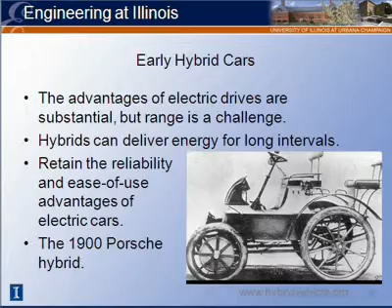Now what happened? A lot of people have different ideas on what happened to electric vehicles. Some people will tell you it's the electric starter and Kettering and other things. Well, in fact, there were two things that happened. Number one really was Henry Ford, if you will, doing it to himself, in the sense of saying, I want to make vehicles for a mass market that have all the features that people want, that everybody's going to want to buy. And sure enough, in 1909, as we had cars that were intended to appeal to a mass market - I haven't tried to do the inflation adjustment on that list price, but it's certainly an intriguing number.

And indeed, at the time, gasoline was actually considered a waste product. It was extremely cheap. In an energy sense, it remains somewhat cheap, although we'll see relative values a little bit later on. So mass production, getting costs down, trying to appeal to a mass market, lots of range, be able to go and do a wide variety of things. By about 1920, the market size for gasoline-driven cars had overtaken that on electric vehicles, and certainly by 1930, electric vehicles essentially were gone, dead and gone.

Reliability has been improving, so if you will, gasoline cars have sort of begun to approach what you can do with an electric vehicle, with still that range issue being there. On the other hand, we had a very long hiatus for 30 or 40 years in which there wasn't a lot of technology change.

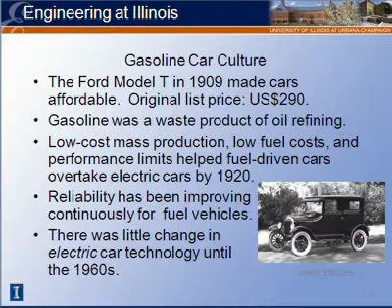Now there's been a great deal, and that's why we're seeing this come back again. Hybrid vehicles themselves began to revive in the 1970s. There were some very nice demonstration projects. Finally, in the 1980s, we got to some serious new electronics applications that made a big difference. The General Motors Sunraycer was perhaps the first classic one there, and I don't actually have a picture of that one, ultimately going to the General Motors Electric Vehicle 1, EV1, project in about the year 2000.

The electronics have been mature now for about 12 to 15 years. When we were doing projects about 15 years ago, there was still an evolution going on. By this time we went through a couple of generations, we were actually working with pretty much commercial off-the-shelf hardware that can do the job.

Batteries sort of continue to emerge. Nickel metal hydride batteries matured enough in the late 90s that they became the basis for the modern hybrid electric vehicle. And the lithium-ion batteries that we have in our laptop computers have now gotten to the point where that Tesla Roadster down there in the lower right can use those kinds of batteries and actually get very good performance out of them.

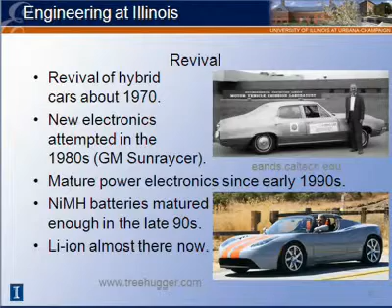So the electronics revolution certainly caught up with this problem in the 1990s. Batteries, if you will, have been moping along and have gotten sort of where they need to be. And the classic example, indeed, was that 2000 General Motors EV1. I don't want to talk about its history and all the things that happened to it. It's a subject of movies and books and other things, some of which is true and some of which isn't.

I can tell you there was a very frustrated engineering team in Troy, Michigan, that was very sad to see that project beginning to go away, and now finally some of the folks up there are seeing the light, as it were, in terms of what could have been done if there had been more focus on it.

But still limited range. That car has a battery full range of about 50 to 70 miles, depending on how it's driven. That's not bad. At the same time, the minivan I have parked out in the circle drive, the fuel light comes on when it's got 50 miles of range left. It starts yelling at me to go get more energy.

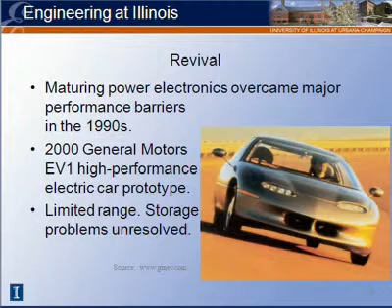So, in terms of a cultural shift here, you have to think of that car as driving around on empty all the time. And some people got used to that. It was easy for them to plan out the trips and understand what they were doing. Others felt like they were always worried about where am I going to be, where's a place I can connect to, how can I get this vehicle charged. It places a damper on what otherwise is a very high performance vehicle.

Now, that said, hybrid electric vehicles have been around for a long time. There's one. And certainly in the very large transportation industry, when you're talking about ships and submarines and locomotives and large mining vehicles, they've been hybrid electric for two generations. It's simply the only way to do very large-scale power management.

So in a vehicle like that one, there's a very large diesel engine indeed that drives a generator, generates electricity, which then is controlled down to electric motors that are hanging underneath on the trucks that actually drive the thing. And when it needs to brake, the motors turn into brakes, send the energy back actually to a set of massive resistors in the back with big fans that blow the heat out. It is a hybrid electric vehicle, and it's been that way for a long time.

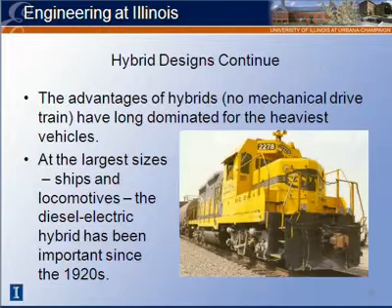And there are good reasons for that. Namely, when you start putting something like an electric motor in a car, you get lots of flexibility, lots of performance, lots of reliability, and relatively low cost. So here's a little motor. I've got a key for scale there. That's one that actually we put into a Ford Escort.

Its nameplate rating says 10 horsepower when you buy it from the motor manufacturer, and it's about a $200 motor. When you look at the way automotive people rate things, its automotive rating is actually close to 100 horsepower. It can take far more abuse than a gasoline engine, but it's perfectly adequate to operate that vehicle. And indeed, if you don't use it right, it's hard to keep the tires on the street.

So it's got a pretty good amount of performance, so performance is not a problem. The motor is easy. The problem, again, is range. It's always range, it's always been about range, probably always will be about range. You've got to store energy that you can deliver to that motor to carry the car along, and it's got to be self-contained and carry itself. So let's look at that quickly, and I'll put some numbers on here to give you some relative perspective.

How can I store energy? There are electrical devices, capacitors, inductors that you can put energy into. There are flywheels and springs. I can hang a great big rock up on a rope and store energy with a gravity method. I can shove a lot of air into a compressed air tank. I can use batteries, or I can use a hydrocarbon liquid of some sort.

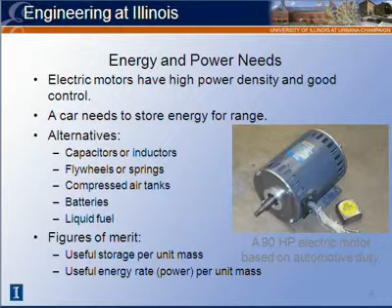Can I make that vehicle accelerate? Can I do some of the other kinds of things that I need to do? So let's get some perspective. I want to list some numbers - metric equivalents, just for comparison.

Lead-acid batteries, we're all familiar with that - everybody's got one in their car. 100 kilojoules per kilogram, whatever that means. Lithium-ion batteries, better by about a factor of 6. That's probably the important thing here. You can take a scuba tank and jam a whole bunch of air into it - that's actually worse than a battery, and it doesn't take into account the weight of the tank, so that's a problem.

Little electronic gizmos that we use, capacitors and some other emerging things, not remotely close to batteries. I have a wonderful brochure from a very expensive, high-end manufacturer of a flywheel system, and down in the bottom it says 'as good as batteries.' So the interesting thing is, after all these years and all the methods and all the things that people talk about, batteries - although people like me hate them - they're a really good way to store energy when you want to carry around something that's portable.

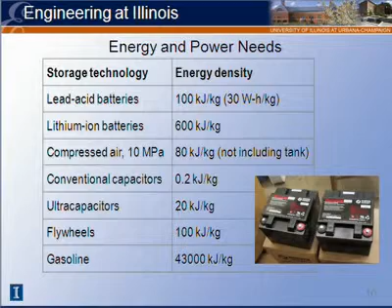And of course, many of us have little portable devices that run on batteries. But liquid fuel, gasoline - 43,000 versus 100 for lead acid, 600 for lithium ion - it's not even close. It's a complete no-brainer. Now the only problem is I can't get all of that energy out. I've got to burn the fuel and run through a thermal process, which typically is only going to give me about a third or maybe even less of what's actually in the fuel coming out to do useful mechanical work. But even with that, even if I give up three-quarters of that, or 90% of it, I'm still far better off than I am with the other technologies. And that's an issue, right?

So here's an electric vehicle demonstrator. It's got about 600 pounds of lead-acid batteries in it, and that massive battery pack gives me about 1 gallon of gasoline worth of energy in that car. Any more than that, and of course the vehicle just becomes a battery carrier - it doesn't really carry passengers anymore or goods, it just carries batteries around. Not a real good trade-off.

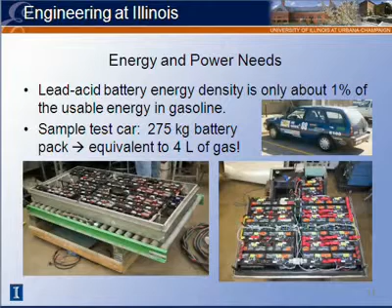So it's really hard to beat gasoline or methanol or ethanol or some liquid hydrocarbon as a way to store energy. And that really is what hybrid vehicles are all about - trying to put those things together somehow.

If I tried to set up an electric vehicle filling station that could fill 6 cars to that equivalent amount of energy in 5 minutes, it would consume more electricity than all of Champaign-Urbana, essentially. So it's really out of the question. And the batteries really can't take it anyway, so it doesn't work so well.

Now, people have put weird spins on this. They said nobody's going to want an electric car because they're going to have trouble refueling it. Well, I don't know. I would rather park my car in my garage and plug it in. Who cares? I'll come back in the morning. That's what I do with my cell phone and my laptop. I don't really expect to plug them in and 2 minutes later have them totally full and ready to go.

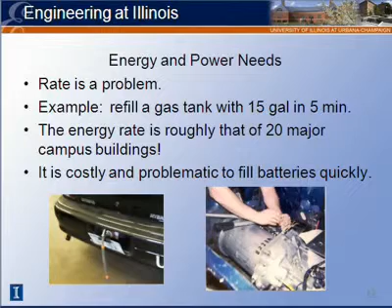It's a totally different world, and indeed there's a lot of disparity in terms of people talking about the different things. By the way, there on the lower left is a plug-in hybrid electric vehicle, which supposedly is a wonderful new technology. That car was built in 1996. The other one is built 3 years sooner than that, but there's nothing new under the sun in many ways, I suppose.

A few minutes about the modern hybrid. There are a lot of different architectures that are used. They really are motivated by different efficiency and emissions trade-offs, and you make a lot of decisions in different ways. I can see this in different things that have come on the market.

For example, it's possible to take a hybrid electric vehicle which has an engine, some sort of electric generator, various controls, one motor (maybe ultimately up to 4, one for each wheel), fuel tank for storage, and trade these different elements off to achieve different end results.

For example, the Honda Insight that was introduced in the United States in December 1999 really was engineered for highest possible fuel economy. When you look at it carefully, you see the issues: it's a 2-seater car, very limited cargo space, a lot of aluminum in it to get the weight down, a lot of compromises to keep the engine running minimally. It gets extremely good gas mileage.

The Toyota Prius, which came out in this country about 3 months later, was in fact engineered for minimum possible tailpipe emissions. I think most of the people who purchased them at the time didn't really understand that. It's not optimized for best gas mileage, although its gas mileage is pretty good. It is optimized for really low emissions, and in fact achieves that quite successfully.

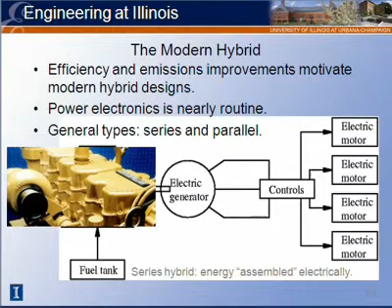Most of the things on the market now are basically parallel hybrids. This one is a clearer representation of one of the Honda vehicles, with a gasoline engine, a transmission, and basically a small motor generator linked into that system to give it some capability. The ultimate is what's on the left, which is what we sometimes call an integrated starter alternator design—this engine basically has an electric motor built into its flywheel.

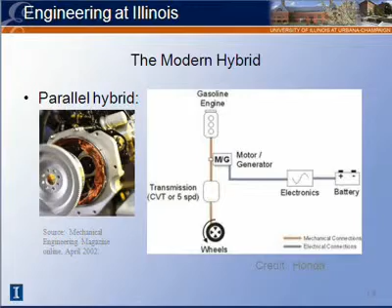What that does in this case is allow it to recover energy when I brake, and turn the engine on and off at a stoplight really conveniently without much noticeable effect. I even saw one version where they actively controlled the electric motor to cancel out torque vibration and basically make the flywheel as if it were bigger, so the engine runs really, really quiet. It's a very impressive technology demonstration that I haven't seen in the market as yet.

Toyota, Ford, Nissan use something they call a dual hybrid because they have modes that sort of look like these different things, although technically we would call them a parallel hybrid. So what happens is in the Toyota car there's a battery pack, a lot of electronics, a motor, an engine, a generator, and then this special transmission that allows me to bring these things together.

And because of the nature of the transmission, they can sort of be mixed and matched. So at times the generator operates, at other times it doesn't. And the things come together then to give a range of functions.

The Honda version is something that's called a mild hybrid that looks a little bit more like the one we were looking at a moment ago. Basically, the idea is to allow the engine to start and stop a lot and get better control over efficiency in particular through a process like that.

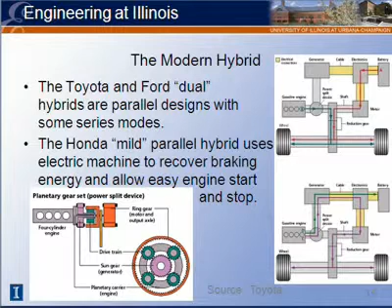Now, I don't want to get technical, but a lot of people who work in this area like to say that their vehicles have continuously variable transmissions in them. In fact, the transmissions in those cars have no variation at all. They're all single speed, fixed. But they have multiple parts so that basically you can bring the energy in from different directions and sort of achieve the effect you would have as if it were variable, but it's not. So I don't know, that name came out of somebody in marketing instead of somebody in engineering, I think.

As you know, there's some in production. The original version of the Insight, again, a two-seater. The original version of the Prius, and those now have been around for a long time. And I remember when they first came out, people said, you know, they're going to have problems with batteries. Batteries are expensive to replace, you know, so on and so on. The car at the bottom there.

You bet. And I use them constantly and charge them a lot.

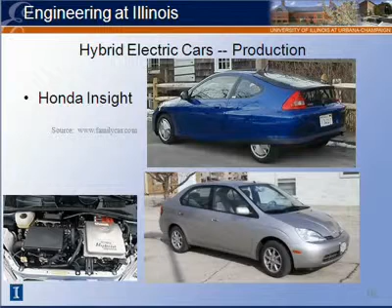All right, others too. Ford certainly joined the fray early on. Lexus is another Toyota version, and many of these do have slightly different trade-offs. What we've seen, for example, more recently is some of the cars from various manufacturers, actually not these, that try to say, okay, we're going to make a hybrid platform, and we've got the performance of the engine, we've got the performance of the electric motor, we'll add them together and give the vehicle a little bit more performance and a little bit better gas mileage.

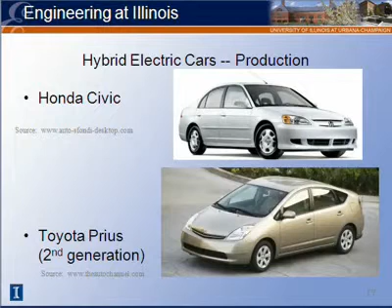And still somewhat better emissions, you know, trying to appeal to broader markets. That's succeeded only to a limited degree. I remember someone who bought an early Honda Civic hybrid and said, well, I'm getting 15% better gas mileage. You know, why? What's the point? I paid more for this car. It's really not showing me dramatic change. They had made a bit of a trade-off to put more into performance. You know, a lot of people aren't that concerned with it. So there's still a lot of marketing that goes on here to try and understand what we can do with these different things.

Okay, I want to get into the energy and emission stuff and get some of the motivation. Yeah? All the hybrids you showed us, all of their energy comes from gasoline. Absolutely, absolutely. Now you're introducing another stage, which is an inefficiency going from the gasoline. So just can you mention the factors that more than make up for that extra thing? What are those? Yeah, we'll actually begin talking about that right here because I want to bring that in.

The point's well taken. All hybrids on the market today get all their primary energy from the fuel. Okay, they have an electric element in the drivetrain. They have a battery pack, but the energy ultimately comes from the fuel tank. Okay, there's no plug-in hybrids on the market just yet, at least in any mass market sense in this country. But you do gain in energy efficiency, and we'll come back to why that is. They actually are significantly more efficient. So yeah, I need to touch on that here, and I will in a couple of slides or so.

Okay, so what are the motivations? Now, I want to go backwards a little bit and think about purely electric for a moment, and then we'll come back to the hybrid. Okay, why electric vehicles today in our current context? I mean, we still have all the things about clean and easy to maintain, and they work well, and they've got a lot of performance. But energy flexibility certainly becomes a significant issue. You know, I can't run a conventional car on coal or nuclear power or hydroelectric power. You know, an electric car I can run on whatever is being used as the regional energy source.

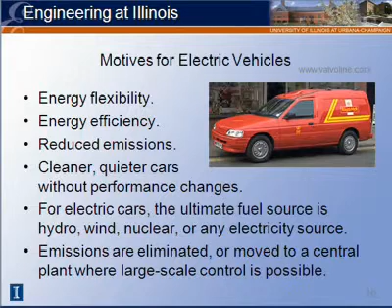Okay, hybrids. Why hybrids, right? Really, here I'm trying to overcome that range issue. I'm trying to get more energy into the vehicle, and I'm trying to overcome the rate issue as well, make it easy to refuel it. But to the question, it's fairly well established now that a good hybrid design, for reasons I'll go through in a moment, can in fact double the fuel economy versus basically an equivalent car of the same nature. So if I take a Toyota Camry, rebuild it into a Toyota Prius, and do my work carefully, I should be able to get about double the fuel economy.

In principle, we've looked at some other things. You look at weight trade-offs and some really, really careful algorithms about control. It looks like maybe it's possible to get up to about triple. So that the old CAFE standard of 27 miles per gallon becomes 54 or, you know, about 80, 81. That's plausible, but it's hard.

Interesting question, okay? He asked, what about city versus highway? A properly designed hybrid car should be far more efficient in city driving than in highway driving. Why? Because you lose less energy driving around at a low speed, it just doesn't take as much power. And in a hybrid, I can actually make the trade-off because I don't have as much overhead as I do in a gasoline vehicle.

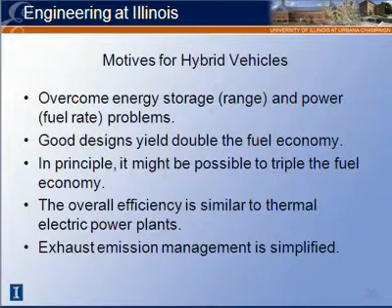Now I want to look at that in more detail, because this is also efficiency. But how does a hybrid electric vehicle reduce emissions? There are at least five things here, and these also impact efficiency. Number one, I don't need as big an engine, because I don't need the engine to do all the work when I want lots of power for short periods of time. We'll come back to that. Number two, I can turn the engine off when I don't need it.

Number three, and this becomes maybe more important, I can choose how to operate the engine, because whatever the driver is asking for, I have multiple ways to address that need. I don't have to address it purely with the engine. So I can make trade-offs either in the direction of emissions or efficiency, trying to improve things.

Number four, and this one is extremely important: modern gasoline-driven cars have most of their tailpipe emissions in the first few moments when they're first started up, because the catalytic converter and emissions management system aren't warmed up and really don't do anything. You've got essentially raw fuel coming out of the tailpipe. In a properly designed hybrid or electric car, I've got this battery pack, and I should be able to use that, for example, to preheat things.

In the Prius, they do it a little differently. They have sort of a mechanical box that tends to confine the emissions for a short period of time as everything warms up. So, for example, my first generation Prius was designed for minimum emissions, which is true. But when you first operate it, you find out that the car's algorithms are all about getting that engine warmed up. That's what it's doing for the first several minutes. It's all about that—passenger comfort, performance, everything else takes a back seat. Let's get that engine warmed up.

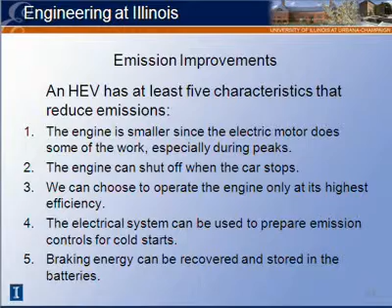Some other interesting things you can do is use engine methods and thermal cycles that maybe aren't so good for operating a vehicle. Diesel-electric locomotives are efficient because they use massive diesel engines, and you can make them efficient if you don't mess with them too much and you've got lots of space, you run them slowly. Very hard to do that in an automobile.

We typically use Otto cycle engines. The Toyota cars now use what's called an Atkinson cycle, which is a little bit more efficient, but doesn't give as good performance. A hybrid car, I don't care—I can make that trade-off because I've got an electric motor to add in the extra short-term performance I need. It's possible in principle to use a turbine, although they don't scale down very well, so it's hard to make a small, efficient turbine. Nevertheless, Volvo did demonstrate a turbine-based hybrid electric vehicle at one time, and in principle that could be a lot more efficient.

Net result: the Prius, the first generation, got about a 90% reduction in tailpipe emissions with basically the same performance as an equivalent Toyota car. The biggest improvements are in hydrocarbons and carbon monoxide. I think the first generation Prius is rated for lifetime hydrocarbons over 100,000 miles, such that if I were to spill one cup of gasoline on the ground while refueling it, I would kill its lifetime capabilities. So it's extremely good for hydrocarbons, and usually it's somebody messing up that causes the problems on top of that.

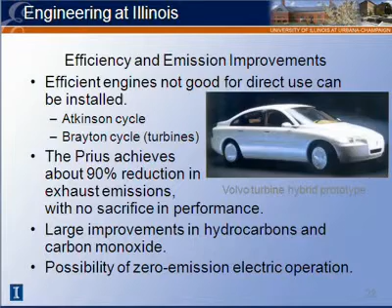You do at least have some possibility of a range in which you operate only on electric, quote unquote, with zero emissions. Again, from a system level, we have to think about where those things are getting moved to. This is an old argument people used to make: I have an electric vehicle, it just moves the emissions to a power plant.

Well, that's a good thing for two major reasons. Number one, I now have this large central infrastructure where I can do a lot more optimization in how I manage an emission stack, and it's well established that this has very significant benefits and makes a huge difference. And of course, I have resource flexibility. But there are some differential impacts there that we need to look at, and you do get overall higher system efficiency. So even though I can build a hybrid car that begins to approach a power plant, if I'm using electric power, storing it in a battery and driving the car around, that stack-up is still more favorable, at least to a degree.

All right, some slightly more specific things here. The true emission impacts depend, of course, on the generation mix in a region, and the results I have are for the average U.S. mix. For example, hydrocarbon emissions with a purely electric car moving its emissions to the power plant—the numbers I've seen are hydrocarbon emissions down around 95%. Carbon monoxide, even more so.

It's very dramatic. NOx is much easier to control at a power plant than in an automobile—this is a hard one to control on a small transportation platform, so there's a big impact there. Carbon dioxide, of course, is only reduced in proportion to the energy use reduction, basically. So to the extent the vehicle is more efficient overall, it can reduce carbon dioxide emissions; otherwise not so much of an effect. So that effect is a little bit more modest.

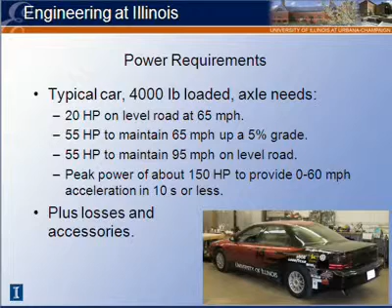So when we go to a hybrid, I can choose the engine to deliver the average needs. So suddenly a sedan like that could have a 60 horsepower engine in it, with the electric motor making up the difference — and the driver will never know. If they want to accelerate onto a freeway at full speed, no problem, it'll give them all the performance they're ever used to.

Really hard to advertise and say, 'hey, I got this wonderful 60 horsepower car' — nobody wants that. Even though its equivalent performance is probably 300 horsepower, we're not in a position where we can present those numbers that way yet. So that'll come.

I've already seen that in small appliances. If you don't believe me, look at the horsepower in a vacuum cleaner. The last one I bought said something like 8 horsepower. You cannot plug an 8-horsepower motor into an outlet in a house—it will blow the circuit breaker immediately. That's how they came up with that number. I have no idea, and it doesn't mean anything.

Okay, costs. Costs are an issue. People ask about this a fair amount. Gasoline, I just chose an easy number here: $2.40 a gallon, 30 miles per gallon. So the energy cost of that car is 8 cents a mile. Sounds relatively cheap.

Electricity here in Champaign-Urbana is about 12 cents a kilowatt hour. A reasonable electric vehicle design is about 200 watt hours per mile. That's 2.4 cents per mile. Well, that's if I charge it at 2 o'clock in the afternoon when everybody's using power. If I charge it at night, it's a factor of 6 cheaper than that, and now the energy is almost free, right? So it's kind of a no-brainer. From an energy cost perspective, electric vehicles, plug-in vehicles, it's crazy. Anybody who had a plug-in hybrid vehicle is going to do their best to avoid ever going to a gas station again. They're going to plug it in, for crying out loud.

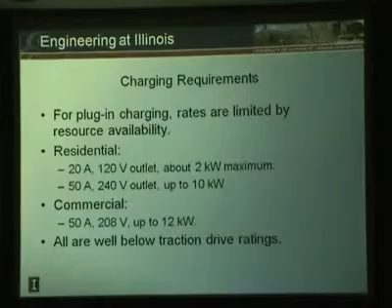We already talked about that a little bit. What I wanted to do is jump to some of these myths. I hear these over and over, even from industry people who are experts. That first one's a direct quote: nobody wants to buy a car just for commuting. There was a time when they were saying, fine, sell electric vehicles as commuter cars, and they say, well, nobody will buy them. Well, pardon me—that was a year ago November, about 13 months ago. That's very much the attitude in the industry. Now, all my neighbors, probably most of yours, have a car that they've purchased that they pretty much use for commuting. So I don't know why the folks in Detroit think that people won't buy commuter cars. They already have them.

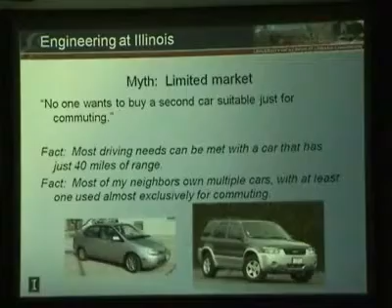That turns out to be a fairly detailed question. Probably the best answer is that in the early days when they were putting in hybrids, they were very concerned about battery life. Anything they could do internally to manage the battery system was really important to them, because that was what was going to give the life. And Toyota, by the way, has been very successful with that—so that strategy has really paid off.

But as soon as you go to a plug-in, now the customer is more managing the behavior of the batteries. It's a lot harder to manage their life characteristics. We've kind of been waiting for the lithium batteries to catch up enough where they can handle that somewhat less controlled environment and still work out fairly well. So that's probably the most important reason. There's some others as well.

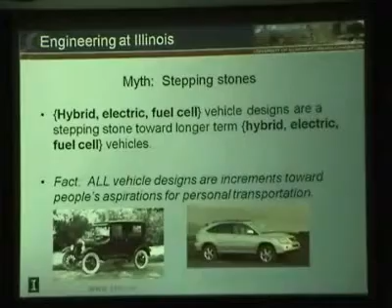I think the other thing that is actually becoming a dilemma is that most of the hybrid vehicles we see on the market today have kind of converged. There's a lot of sameness in the architecture. It turns out there really aren't a lot of very good reasons for that. In fact, the ones we see on the road really don't approach recent history of what is well known to be achievable with electric and indeed even hybrid vehicles. So not only is the jury still out, there's still lots of room for innovation, and it's really important that these guys not get stuck in the wrong directions.

So near-term trends: we will see plug-ins quite soon. We may see them quietly enter the market shortly. Certainly the Chevrolet Volt has been trying to make a lot more noise. I actually think it has a fair amount of promise. There are market issues, absolutely, but I think it's got a significant possibility. I think electric vehicle designs will come into play and will be quite viable. Nissan is working on one that they expect to release in about 2 years here that looks really interesting.

The emission impacts are large, and indeed they will become larger as we are able to use more renewables, and these kinds of transportation solutions help to implement those. Certainly there's a lot of complementarity there. And when you look, say, compared to biofuels and even petroleum-based resources, there's a lot of very significant advantages here that people haven't been able to take advantage of. So we will see the revival of the electric car, we will see a lot more hybrid cars, and it will make a big difference in the future.

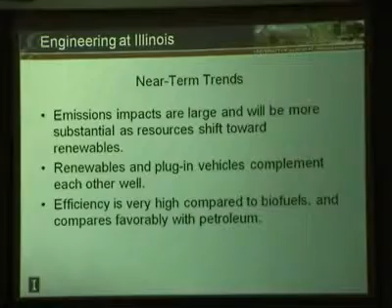Yeah, really good question. There's some very, very nice Volkswagen diesel engines, for example, extremely efficient, high fuel economy. You can get almost to the levels, and there's fundamental reasons for this. There's no real reason why you couldn't get to that double fuel economy with a somewhat more conventional power plant. But your point's well taken - can you integrate these back into a hybrid platform and get even more benefit? In principle, the answer is yes. I think maybe that's a way you get to the triple. But once you start wanting to go even beyond that, now you're talking about an electric car, so it becomes a different solution. So the simple answer is yes. I don't know how many projects are going on in those kinds of arenas. I've seen a few - that old Volvo turbine project was an example. But absolutely, once I build a hybrid plant, I have a lot more possibilities in terms of what I can use for the engine.